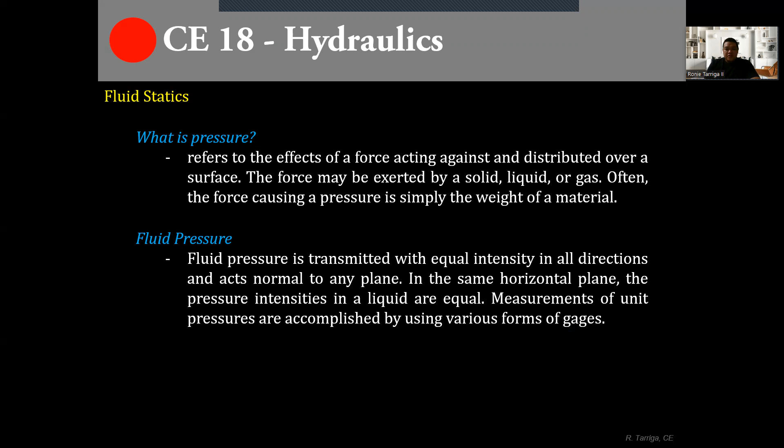So actually, this statement is Pascal's law. I'll explain it later when we get there. Pascal's law: fluid pressure is transmitted with equal intensity in all directions and acts normal to any plane. In the same horizontal plane, the pressure intensities in a liquid are equal. More of the explanation later on.

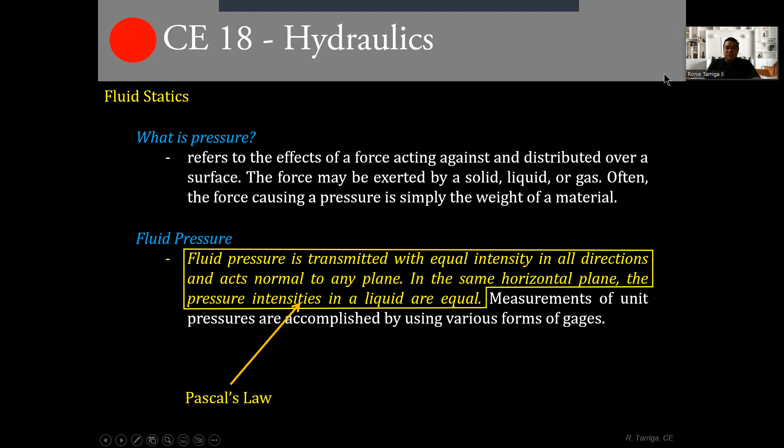So the unit pressure or pressure is expressed as force divided by the area. Mathematically, pressure is equal to force over area. The unit is Newton per meter squared, or Pascal. In English units, that is pound per square inch or PSI, or pound per square foot, PSF. This is a basic formula. So let's proceed.

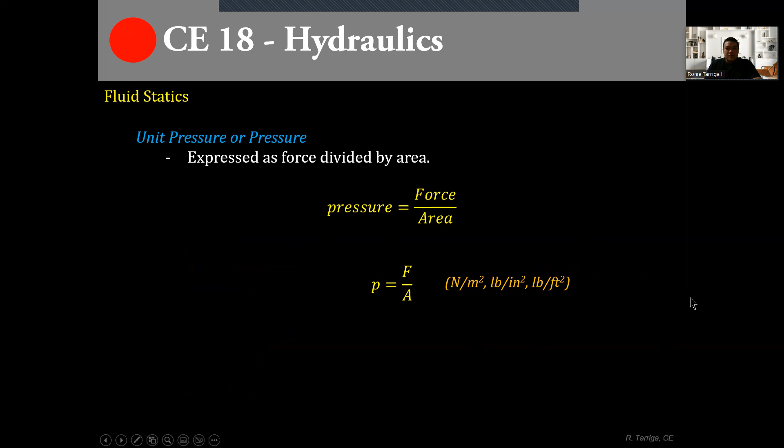So suppose there is a fluid with unit weight gamma, and we are asked to solve for the pressure at this yellow point. Pressure is equal to gamma times the height, the height from the reference point, the free surface, to the point. The unit is Pascal, PSI, or PSF, because gamma has a unit of, for example, Newton per cubic meter, so multiplied by height it becomes per square meter.

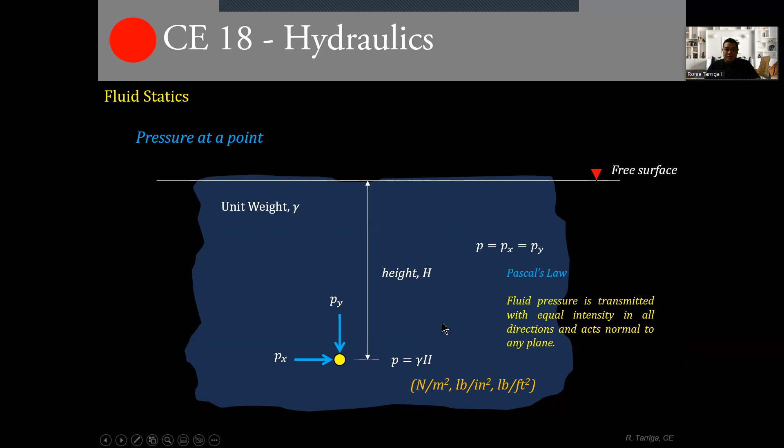So let's now proceed with the difference in pressure. So syempre, kanina yung reference point lang natin is the free surface. So what if there are 2 points na nag-vary? So dyan, how do we solve the pressure? Pwede nyo gawin, simply kunin mo yung pressure at point 1, kunin mo din yung pressure at point 2, tapos isubtract mo dalawa.

Di ba? But anyway, yung pressure pala, suppose sa water, does the pressure increase magkalalim or magkababaw? Ano yung ma-experience nyo dati if mag-diving kayo? So syempre, when you are going to dive in the water, you can feel sa imong ears, sa eardrums. So that means na yung pressure sa mas ilalim na part is higher.

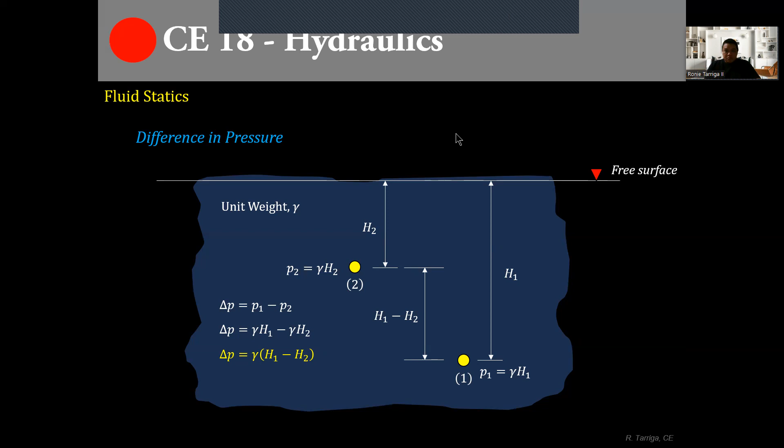So ito, this is how you get this. Pressure 1, pressure 2 is subtract. Or pwede rin ganito. Delta P, di ba si P1 is gamma H1. So si P2 naman gamma H2. So delta P or the difference in pressure is gamma, which is same lang naman siya ng unit weight, times the difference of H1 minus H2. Ito siya, distance between the 2 points. Simple na dyan siya, class. Mas ma-appreciate ninyo sa examples later on.

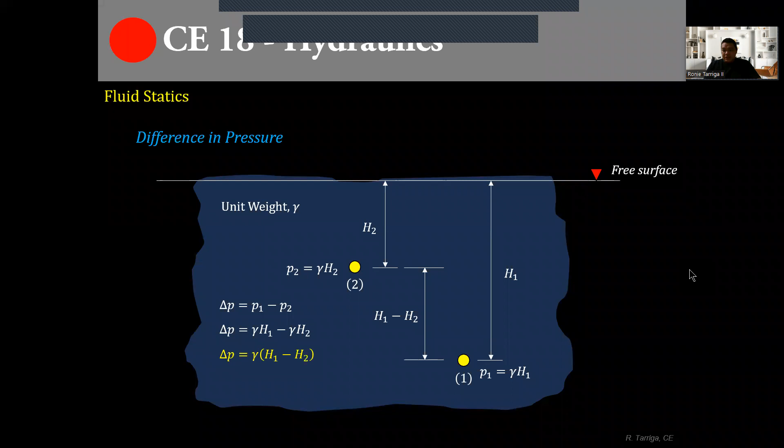So pressure heads. Pressure head, denoted as H, represents the height of column of homogeneous fluid that will produce a given intensity of pressure. Ginabuhat man siya yun ang pressure head because of the instrument we are using. Suppose you heard the piezometer, the manometers. Calibrated siya nga katong mga line. Dili man siya pressure gauge tanan ang naka-attach dito. Pwede ra man katong mga lines lang.

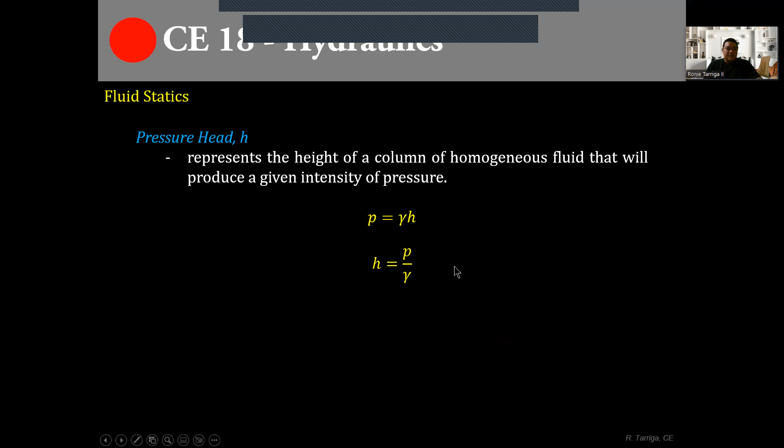So ang ilang ginakuha is the height or the heads. Kumbaga in reference to a certain level, reference point, ilan yung height of the water, height of the column dun sa manometer or piezometer. So baliktarin nyo lang, pressure is equal to gamma h, so yung height niya is P over gamma, di ba? Unit niyan is meter. Sige. Next. Pressure variations in an incompressible fluid.

Anyway, medyo mabilis ako. Anyway, video man ko na siya. So you can pause it. Okay ra dyan na siya, di man pareha og face to face nga makuan lang nimo siya hunong tana. But dire, pwede man mo ma-pause. Basta. Okay, let's continue.

So pressure variations in an incompressible fluid. As what I've discussed last meeting, how do we define incompressible or compressible? Based siya sa bulk modulus of elasticity, yung E, if you're listening sa previous topic natin. If the pressure is much higher, gamay lang siya og percent change sa volume, meaning incompressible siya. Dako na kay gi-exert nga pressure tapos gamay lang siya na change, incompressible fluid siya.

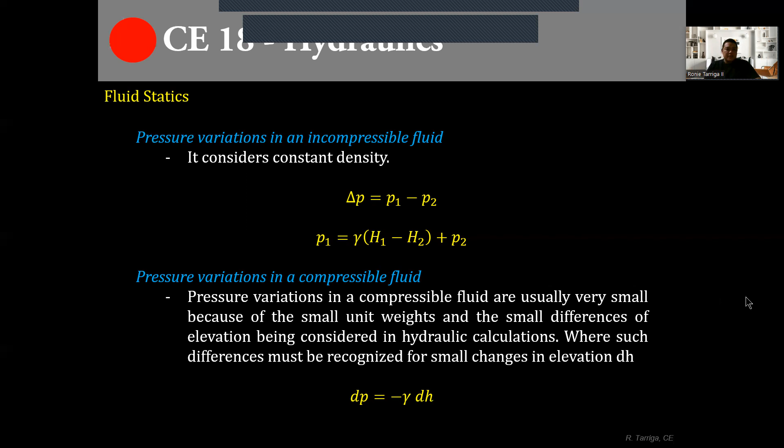Yung negative sign dire is when you go up, magka-lesser ang pressure. So mao na siyang significance sa negative. So formula based na jud siya, guys. So next, let's proceed with these terms.

Absolute and gauge pressure. So absolute pressure uses absolute zero, which is the lowest possible pressure, and the pressure that would exist in a perfect vacuum as its base.

So gauge pressure is measured with atmospheric pressure as its base.

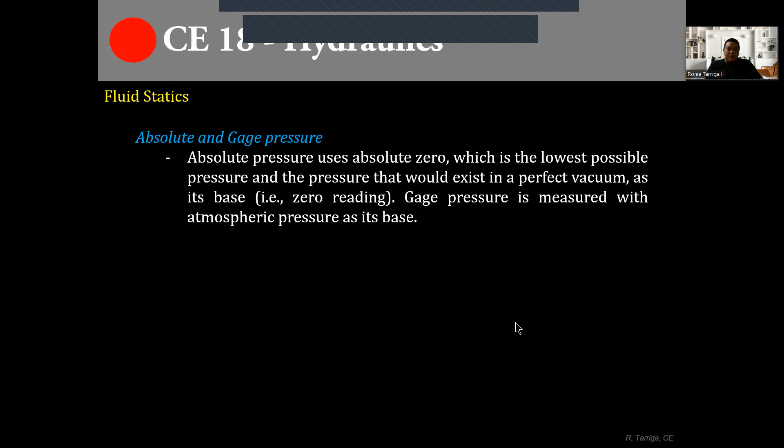So anyway, as what I'm saying, here's the graphical one, since we engineers are visual. So as mentioned earlier, absolute pressure is measured from a zero or absolute zero base. Suppose this is the line, this white one. Any point above there, if measured from this absolute zero reference, is absolute pressure. Suppose this line is the standard atmospheric pressure. I don't mind the local atmospheric pressure; we use the standard, since SI units are standardized.

So absolute pressure, you measure from the zero reference, absolute zero. Gauge pressure is measured from standard atmospheric pressure. You can see in the graph, this distance is the standard atmospheric pressure. So absolute pressure would be standard atmospheric pressure plus gauge pressure. If you go below standard atmospheric pressure, that is called vacuum or suction. The pressure is still absolute if measured here, but its gauge pressure is vacuum. So P absolute is equal to P ATM plus or minus P gauge.

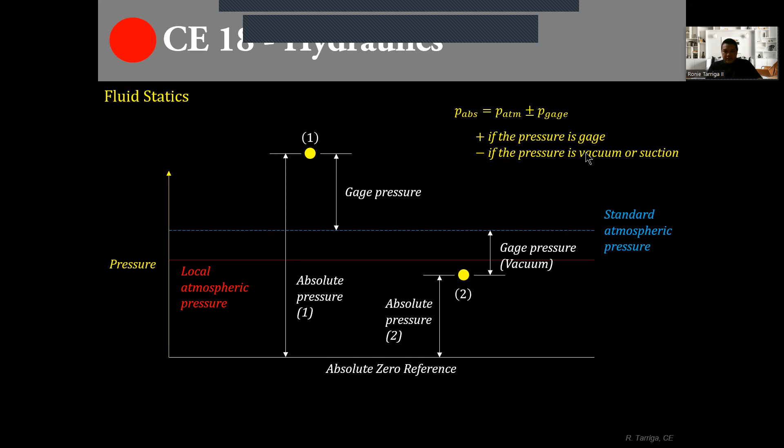Next, the instruments measuring pressure. First is the barometer, a device that measures atmospheric pressure. It has a gauge with mercury as its liquid, which rises and falls based on atmospheric pressure. The piezometer is either a device used to measure liquid pressure in a system by measuring the height to which a column of liquid rises against gravity, or a device which measures the pressure of groundwater at a specific point.